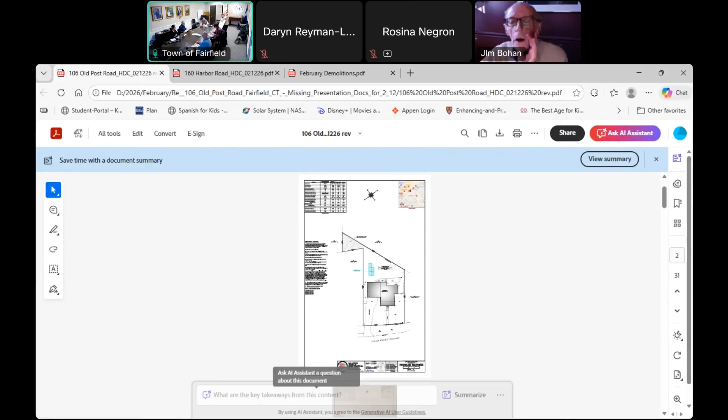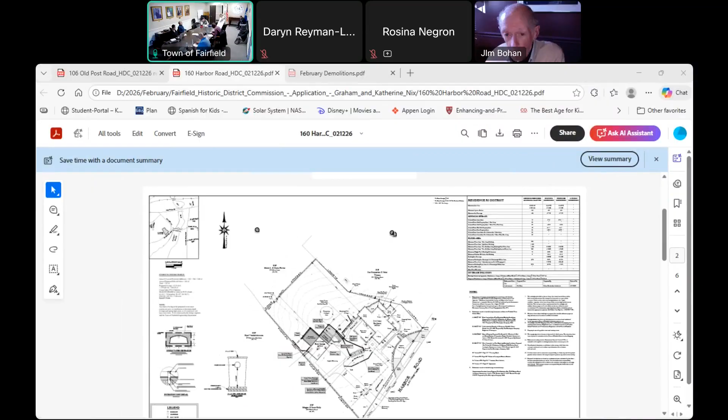In a larger plan view. Thank you.

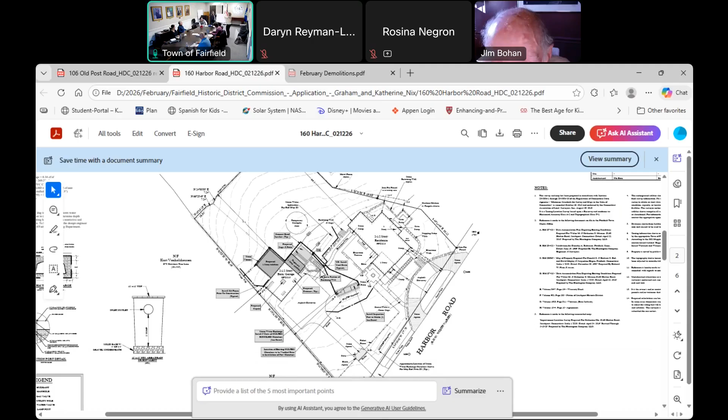This is the existing garage underneath the barn, and we'd like to use the space under the 10-foot addition for kids' bikes and a way for the children to get in there and get bikes and things out. We're going uphill here, and there's a lot of outcropping, so there'll be crawl space if possible. That's about it.

And then this is the 10-foot addition, a little patio area leading down to steps. This is an existing wall, which we're planning on modifying. Right now it goes right to the barn, and we'd like to cut it back, leaving this part and just run it back in to maintain the retaining wall. And then these are the two little dormers on the front. There's an existing loft there now that has almost no headroom, so we're looking to make that a usable space.

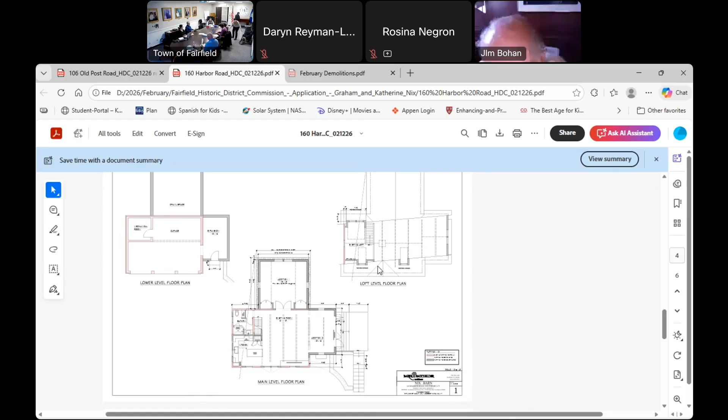So after December's hearing—is it December or January? I think January. Yeah, January's hearing, thank you.

We took the commission's advice to go a little bit more modern, to differentiate from the house. I put the architecture of the front of the house down here so you can see that this is now, I think, pretty well differentiated from the house, with the window style now mimicking a 2/2 style in the barn, although they are all awning or casement type windows.

We are changing the style right now. These barn doors match the siding; they're basically flush with siding over them. What we're looking to do is make it a little bit more stylized and finished looking, putting in the diagonal that is iconic in barn imagery. And so this is the existing gable, and then we're looking to put in two small shed dormers.

What we're trying to do is right now inside the barn is extremely dark. Everything we're working towards is making the space that is fully vaulted lighter and brighter, and then we have one small cupola at the very top.

Here is where we're walking out the door on the side, and there's a railing here that is wood with just an infill of net wire mesh behind it. This is the door where the children can go in and out, and this is the wall.

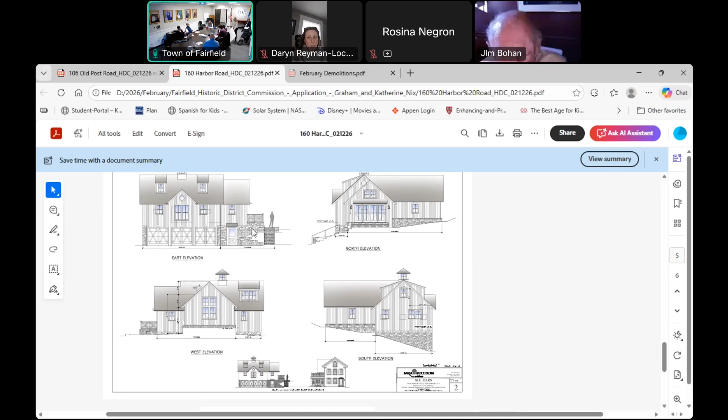Thank you very much. The next item on the agenda, we're going to go back to the first one: Candace Singleton and Nicholas Pagnozzi, 106 Old Post Road, Fairfield, Connecticut, for a property located at 106 Old Post Road. For the addition above the existing garage to accommodate bedroom number 3, add a new primary bedroom, bathroom, walk-in closet, and a balcony located off the primary bedroom.

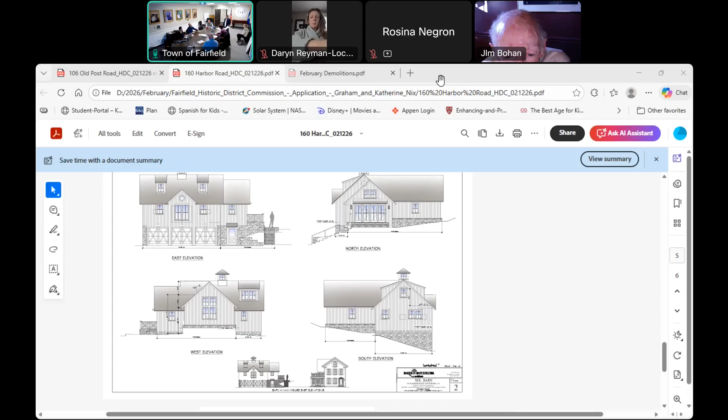Is there anyone here representing this application? Yes, I am. Can you introduce yourself, please? Good evening, members of the committee. I'm Patricio Rodriguez. I am representing JP Engineering and I'll show the improvements that we made since the last meeting we had before.

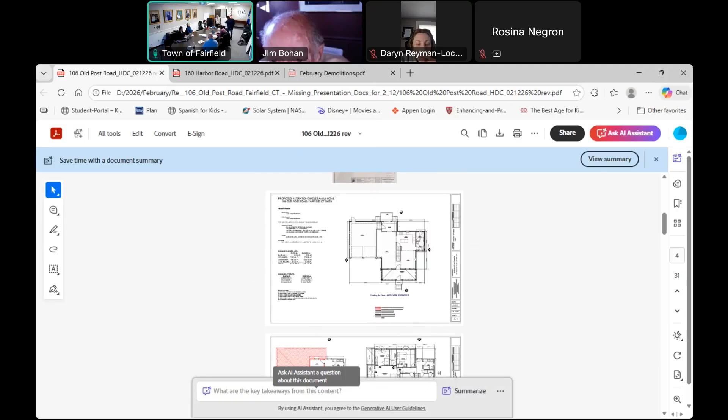We have two. This is the addition in black walls. We have this almost 5 feet setback zoning requirement on the second floor, that's why we have this one here.

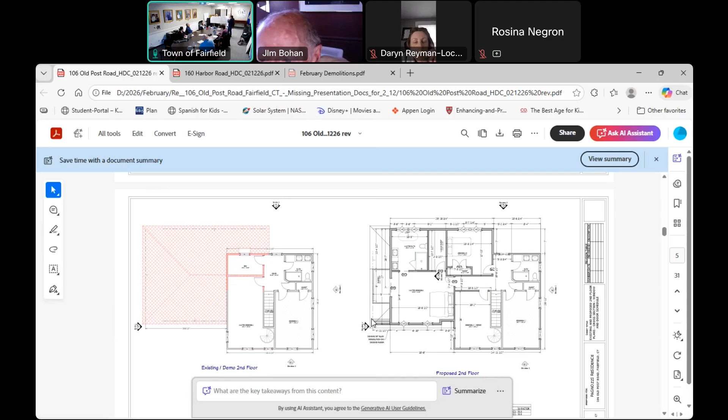What we need is unfinished storage, and we lowered the height, it's accessible, but the door is just 32 inches high. It's just for storage or some kind of equipment.

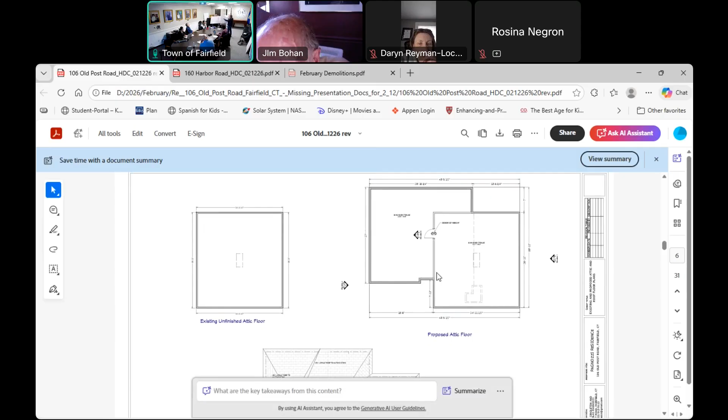And this is the existing house right now, and how it's going to look. We captured all your suggestions and eliminated from the beginning. We had 3 dormers here, we eliminated those and lowered the ridge of the addition to keep that addition secondary from the elevation. It doesn't have to disturb the main thing in the house.

And we separated the windows that somebody suggested. Some commission members suggested we have 2 double windows there.

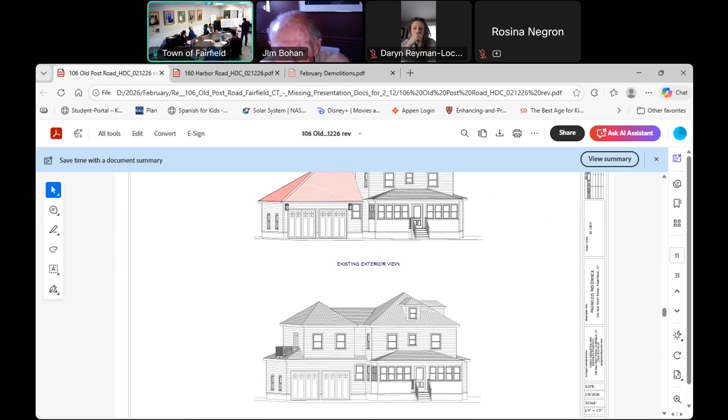This is going to be like the living room area, to have a better idea how it looks. So everything is to lower the visual impact from the front street.

In the presentation, we have a few comparisons still to show, from the street and from the other houses next to the project.